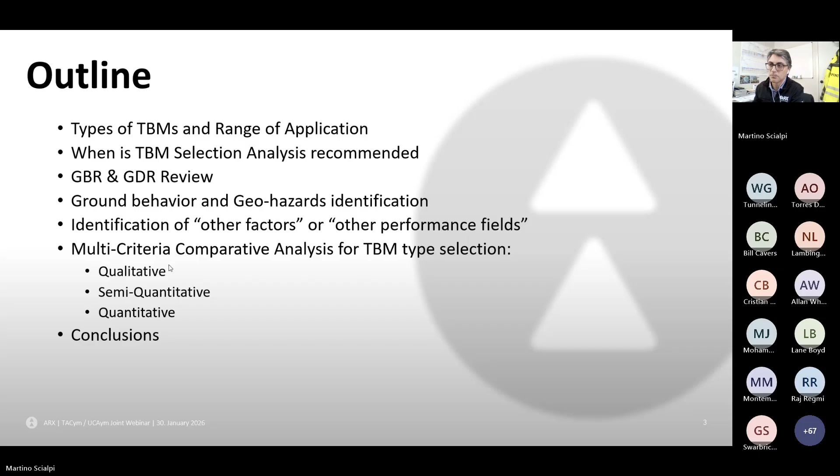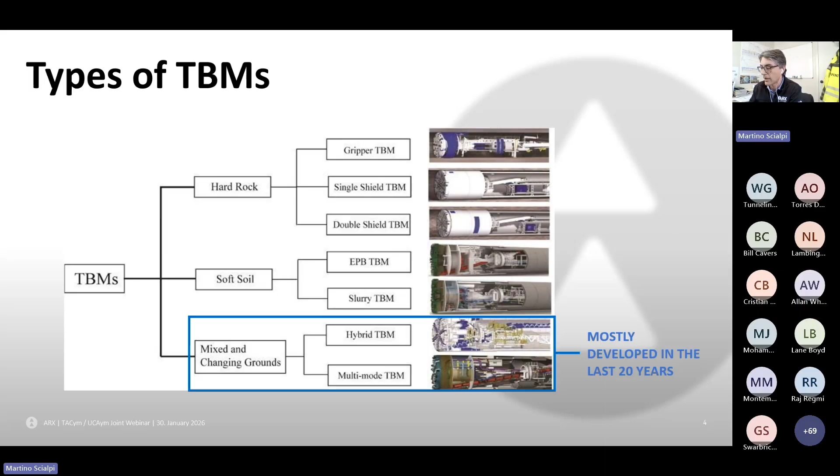So here we start with the types of TBMs. As I said, this has already been extensively covered in December. I just wanted to show you one more time that typically we classify them as hard rock and soft soil. The hard rock machines are generally three different types: gripper or main beam TBMs, single shield and double shield. In soft soil, we are very used to define or recognize EPB and slurry machines, but we also have machines that are able to adapt to mixed face and changing ground conditions, the so-called hybrid or dual mode or multi-mode type of TBMs that have been particularly developed in the last 20 years.

Range of application of hard rock machines. Briefly, when to use a gripper or main beam TBM: it's typically good rock quality with self-supporting capacity ground, where extremely poor or faulted ground is not expected, and where high water inflows are also not expected. As you can see on the right side here, there is a typical layout of a gripper or main beam TBM.

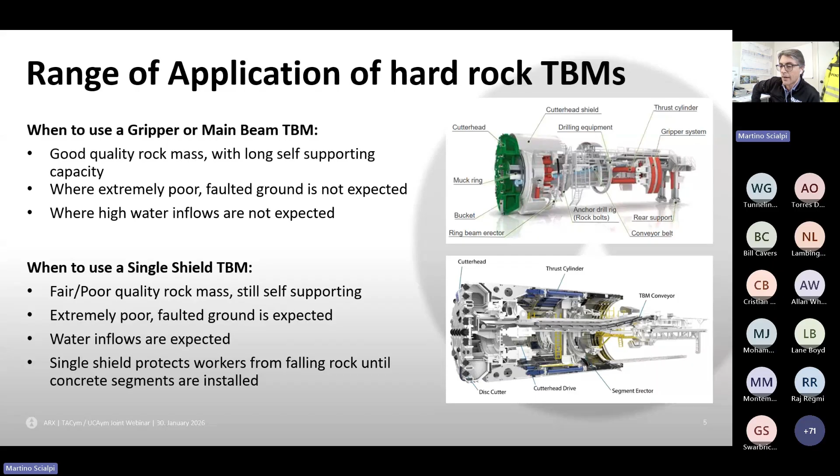In the same way, a single shield TBM would adapt instead to fair, poor quality rock mass, still self-supporting. Extremely poor faulted ground can be expected. Water inflows can also be anticipated. In this specific case, as well as the double shield we'll see next, the single shield is able to protect workers from falling rock until the concrete segmental lining is installed right behind.

Double shield TBM has a lot in common with a single shield. The main differentiator is that the double shield is able to advance and install segmental lining at the same time. It would adapt to poor quality rock mass with limited self-supporting capacity.

Fault zones can be expected, and high water inflows can be expected. In the same way I mentioned for the single shield, the tail shield and the whole shielded section of the machine offers protection to the workers.

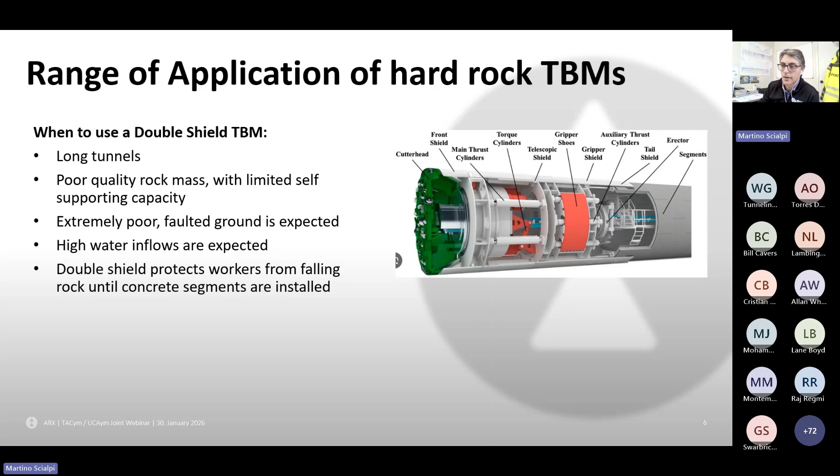Shifting to the soft ground hybrid TBMs, we know that EPB TBMs specifically perform better in cohesive ground with low permeability, and the use or addition of additives can extend that range of application also to sandy and gravel soils. The slurry TBM is more suited for permeable granular soils.

Polymers can be used to excavate ground containing high amounts of silt and clay, and can handle cobbles or lumps of rock to a size that can make it through the hydraulic mucking system. When combined with disc cutters, this machine is able to excavate rock too, while the hydraulic mucking system helps manage high water inflows.

And then there is the whole range of hybrid multi-mode machines that can be adapted to all these conditions, from soil to mixed face to hard rock, above and under the water table.

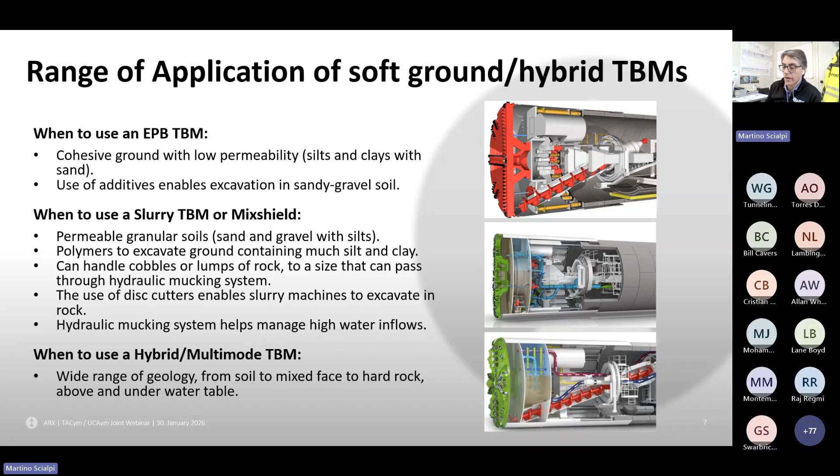With that covered as a refresher, let's get into the TBM selection analysis and when it's actually recommended to be performed. Assuming first that the TBM tunneling specifications allow a choice and aren't so prescriptive as to indicate a specific type of machine, the assessment and comparison of alternative approaches becomes necessary, in our opinion, every time geological complexity or uncertainty define the project.

Every time there are variable conditions along the same alignment, like rock, mixed face, soft ground, above and below the water table, high water pressure, high water inflow - those are the conditions that make the alignment and project complex enough to pause and take the time and effort to verify which machine and machine features would better comply with all the requirements.

Low ground cover and proximity to existing structures, like foundations or underground utilities, is obviously a discriminator above and below ground, along with limited or not fully representative geotechnical investigation. Sometimes we deal with projects where full characterization isn't provided - there are gaps of information - and that's where a TBM that can adapt itself to a wider range of conditions may be useful.

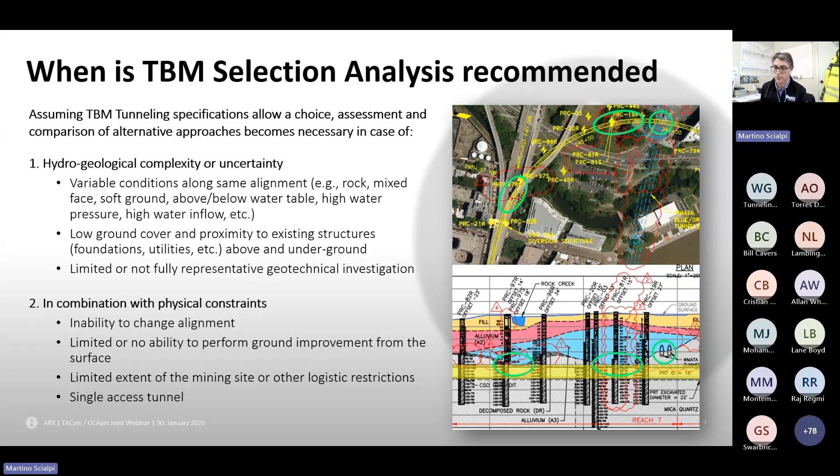The basic approach has long been that where the tunnel is very long or under complex geological conditions, the tunnel method is selected based on the condition prevailing along the alignment. But we're trying to move past that approach, leveraging the evolution of TBM technology over the last 20 years.

This means understanding project requirements and constraints, assessing the risk associated with each anticipated condition, and selecting the TBM technology that meets requirements and provides the best possible mitigation measures in all conditions - not just the condition prevailing along the alignment. The current TBM technology allows us to adopt this better approach.

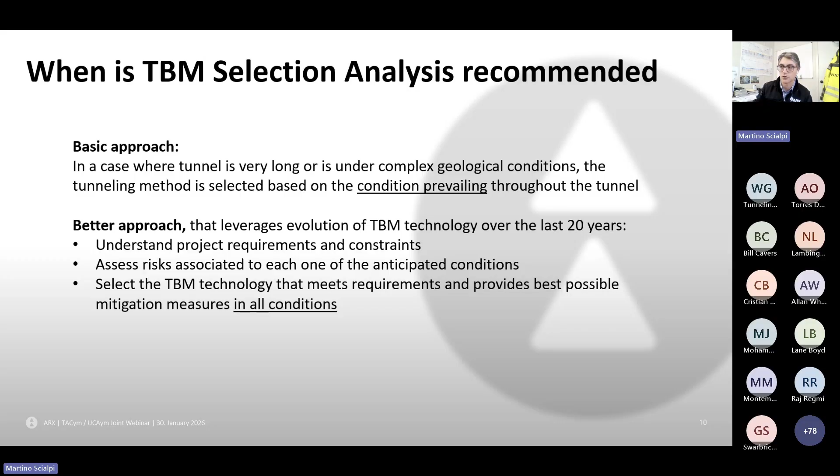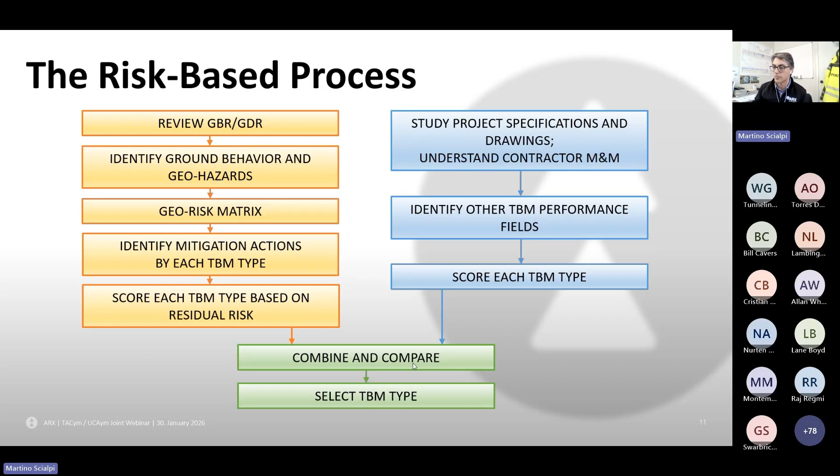So let's get to it, starting with the GBR and GDR review and what that means in terms of TBM selection. First, for those of us who may not be super familiar with a geotechnical baseline report and a geotechnical data report...

The first one is a contract document that establishes the best possible understanding or interpretation of the subsurface conditions. Its main purpose is to clearly define and allocate between the two contracting parties, the contractor and the owner, the risk associated with the ground conditions and behaviors being baselined.

The geotechnical data report is also a contract document, developed by the designer's geologic or geotechnical engineer, presenting or collecting all the factual information gathered during the geotechnical investigation program, which includes logs, photos, field, and lab test results.

Obviously, the intent and purpose here is to have baseline statements in the GBR that are consistent with the data gathered in the GDR.

For your reference, these definitions and a lot more can be found in the geotechnical baseline reports guidelines, published by ASCE and UCA of SME, but I believe it's widely adopted anywhere in North America.

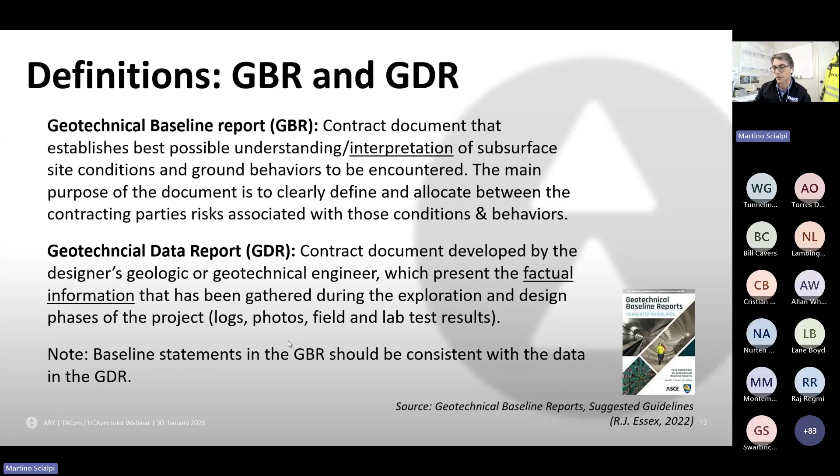So in the GBR for rock TBM tunnels, rock characterization is typically based on characterizing rock type, geologic formation, mineralogy, intact rock properties like bulk unit weight, compressive strength, elastic modulus, Brazilian tensile strength, and the abrasivity index. Degree of weathering, degree of fracturing in terms of RQD, joint orientation and characteristics are typically included.

Rock mass classification is not always included, but very useful to have - GSI and RMR, we'll talk more about those later. Groundwater: depth, conductivity, hydrostatic pressure, location of confined water, chemistry of the water itself, as well as predicted water inflow, which is not always included. And then contamination of the ground and groundwater, as well as the presence of gas.

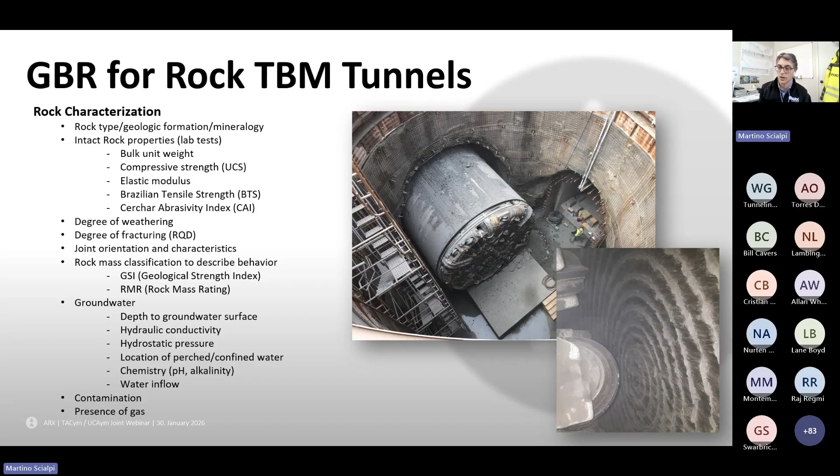For soft ground tunnels, soil characterization is typically based on soil type, thickness of the strata, blow count, grain size, percentage of fines, abrasivity of the soft ground or matrix, and a selected ground classification system that describes behavior - we'll take a quick look at that later.

Clogging potential is extremely important and is a decisive factor when it comes to TBM selection on many projects. Obstructions, natural and man-made - I'm referring to existing utilities if man-made, or abandoned foundation piles in the ground, as well as cobbles and boulders if natural. Groundwater: depth, permeability, hydrostatic pressure - this has a lot in common with rock - chemistry and water inflow, and again, contamination and presence of gas.

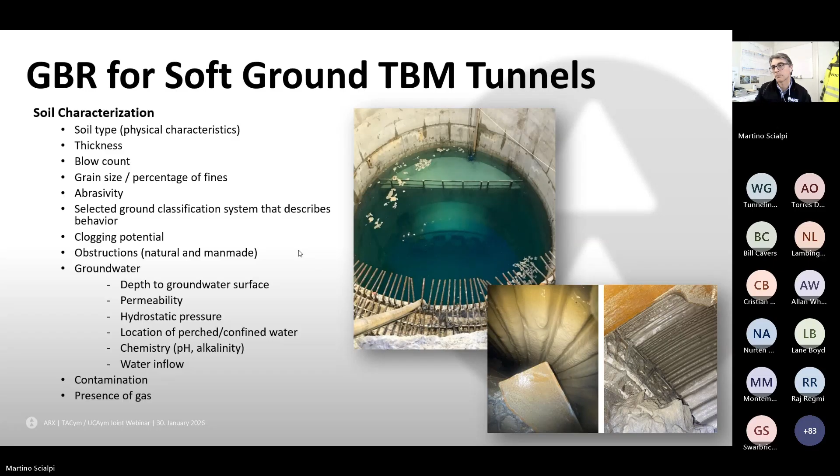The independent GBR and GDR review and interpretation happens by reviewing the raw data generated during the geotechnical investigation included in the GDR. It gets into characterizing the ground conditions independently with specific focus on data from the tunneling zone - the tunnel horizon, the tunnel envelope, plus or minus one diameter. You'd be surprised how different that interpretation may end up being versus the one provided in the GBR, which typically includes all the data at any depth.

Comparing results to charts or ranges including the GBR, identifying or trying to resolve any inconsistency between the independent ground characterization we perform as consultants and the GBR, and then defining the likely behavior of the anticipated ground with means and methods in mind.

Typically, the GBR is providing an indication. There is a paragraph specifically dedicated to ground behavior or interaction of the ground with the excavation methodology, but that doesn't always cover all the details contractors need. And then determining the geohazards and related potential impacts on the progress of the work during tunnel excavation is the real input we need to determine what's the best machine for the job.

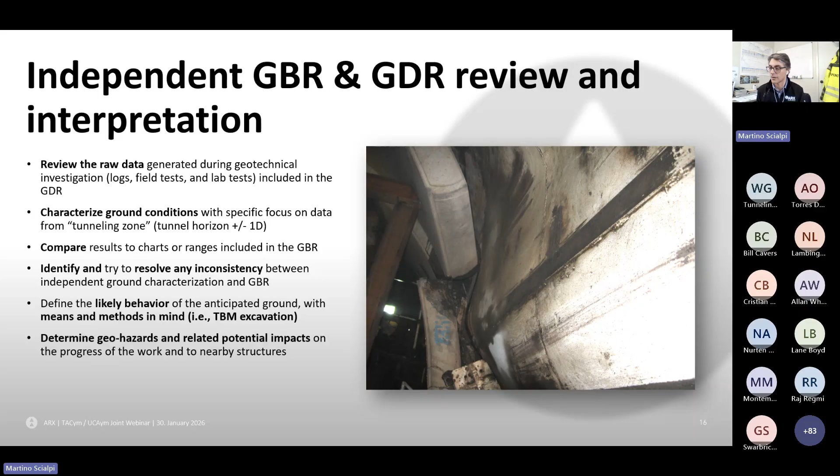You may be wondering, what's that picture on the right side? That is a picture from a job I was on many years ago, my first job actually, where we entered with our double shield TBM into very highly squeezing ground conditions, to the point where the tail shield was completely bent and deformed by the convergence of the ground around the machine, with severe damage to the lining. It's probably the best example I can give of conditions that were not predicted, mostly because of a lack of information over an extremely long and deep tunnel, which didn't recognize these as a risk.

Here are some examples of results from our independent analysis review of the GBR and GDR that we as ARX perform for contractors. As you can see, there are differences, and these are just a few of the things I can show you, but when considering the rock type for a specific job within the tunnel envelope of ±1 diameter, that's the area around the TBM that really matters for decisions functional to TBM selection.

As you can see, there are differences as well in the UCS. The distribution of the UCS isn't necessarily the one the GBR is baselining, because we are considering, most of the time, a different range of data, the one that in our opinion is more relevant.

For grain size distribution, in this specific case we consider all the data, but our replotting of the grain size curves isn't necessarily matching the boundaries set as baselines by the GBR, and that's very interesting information to have, as well as the clogging. On this chart, you can see that the medium and high clogging baseline is probably on the conservative side when you consider only tests from the tunnel envelope and the area of interest of the tunnel.

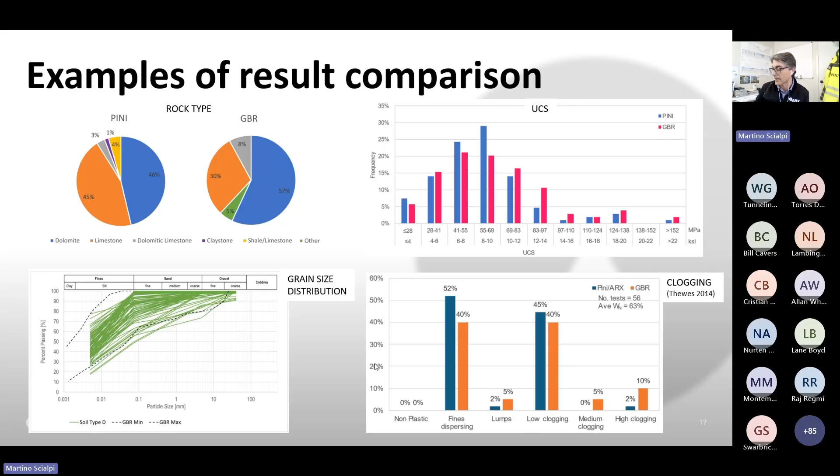Here is another example of a geomechanical characterization we perform for rock tunnels, done every time the GBR doesn't provide all the information actually needed, in our opinion, to characterize the ground and its behavior versus the type of machine needed for the job.

So in this GBR, we only have RQD, UCS, and BTS provided and baselined. On the basis of the geostructural and intact rock properties, the mechanical quality of the rock mass was estimated by us, determining the GSI and the RMR with a probabilistic approach. Obviously, the RQD alone was not sufficient to describe the rock mass conditions and classify the behavior, so we had to do something more, and with the data available in the GDR, we managed to determine GSI and RMR.

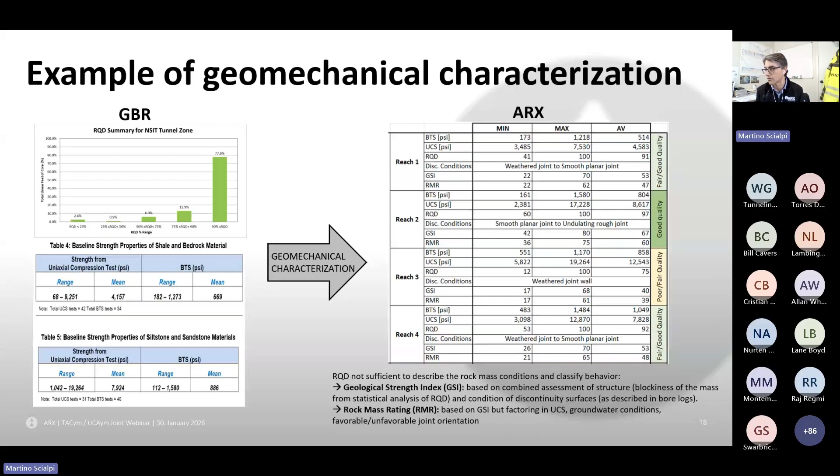This classification, or the determination of these parameters, helps define homogeneous zones along the alignment or reaches that are not just based on parameter distribution, but also on the actual quality of the rock and predicted behavior.

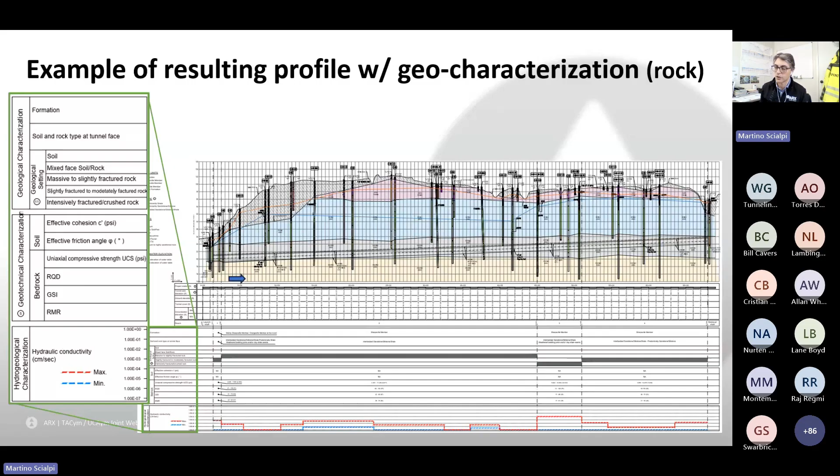Another example is this tunnel in rock, for which again we ran our own independent analysis. We provided geomechanical characterization with RQD, foliation joint orientation, Q value, RMR, and GSI. This is because, again, more indexes, the better.

In this case, this is a tunnel that is only partially excavated by TBM—there are also drill and blast sections—so having those parameters is definitely beneficial. The hydrogeological characterization is part of what we plotted along the alignment, as seen in the previous example, but this time we went beyond that by also calculating, in a tunnel where a lot of water inflow is predicted, what amount and where.

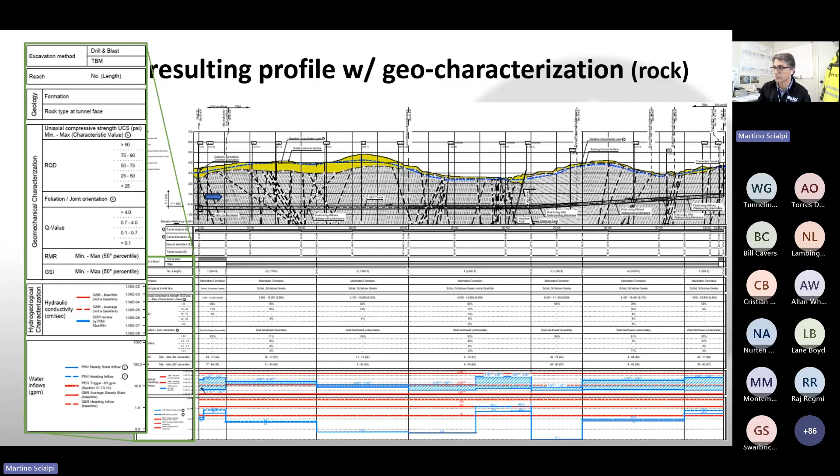Another example of a tunnel, slightly different. This isn't entirely rock, but rock and soil. The characterization here obviously had to tie into soil parameters as well as rock parameters, and we did the best we could to characterize the mixed face conditions at the transition between rock and soft ground.

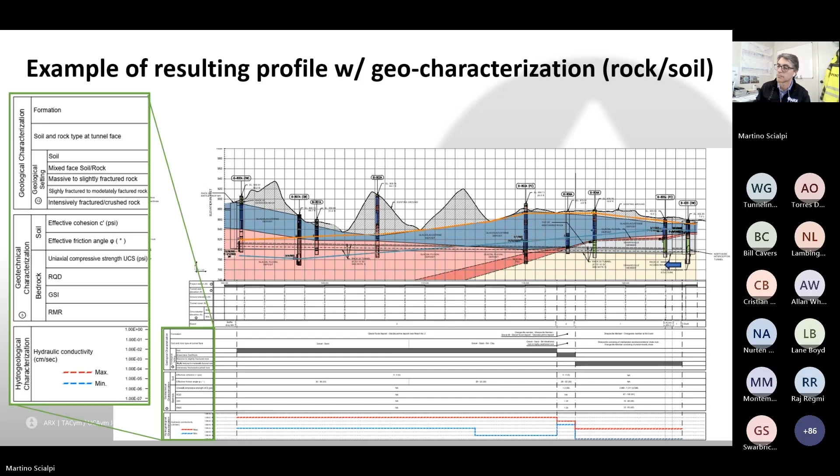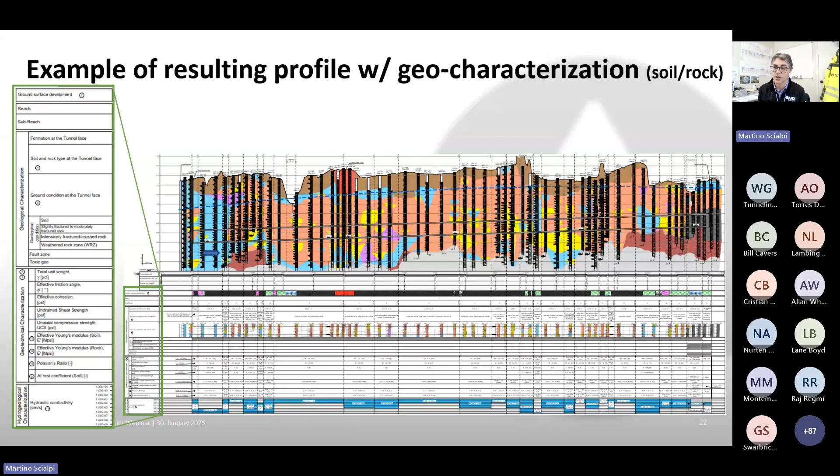Here is the last one, soil and rock again. As you can see, this is an extremely heterogeneous alignment characterized by granular material as well as silt and clay. So particularly in this case, it was very beneficial to develop this profile with specific characterization and identification of sub-reaches within the reaches already included in the GBR, in order to provide the contractor with a more granular interpretation of the expected ground conditions and behavior along the alignment.

So this is the data that you would typically need to then determine geohazards and ground behavior as a function of geohazards based on ground behavior. So the next step in the process, in that flow chart we saw at the beginning, is the determination of the excavation behavior and related geohazards. One methodology we like to use takes advantage of the multiple graph developed by Russo, who

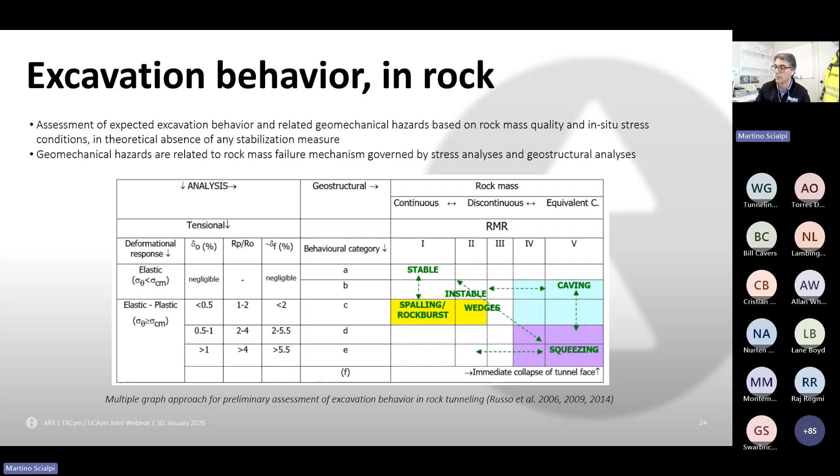is an ARX employee. But again, this is more for your reference. You find plenty of literature on this specific methodology developed by a colleague of ours. The implementation of the multiple graph approach is based on probabilistic analysis of variability of GSI and RMR. So you understand why it's so important for us to determine those two parameters and the combination of those two with the overburden conditions. This is a multiple graph, and by basically working your way through the four charts, it's then possible to determine the probabilistic occurrence of geomechanical hazards in each tunnel reach. You would repeat this effort for each one of the reaches along the tunnel alignment.

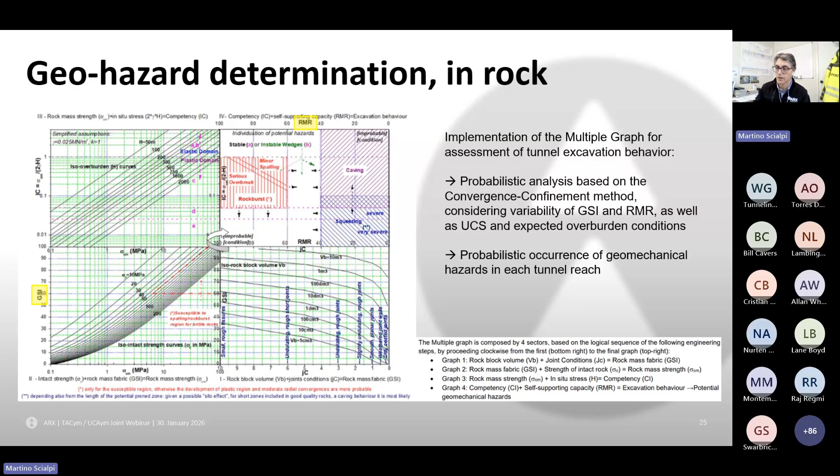When it comes to soft ground, there are engineering properties that are determined to basically characterize soil behavior. They are listed here: strength, compressibility and consolidation, permeability, density and compaction, as well as plasticity. All the above can be determined as a function of grain size distribution and Atterberg limits, which are typically included in the GDR. Without getting into too many details, a typical reference for the industry is the Tunnelman's classification for soft ground behavior developed by Terzaghi and Heuer.

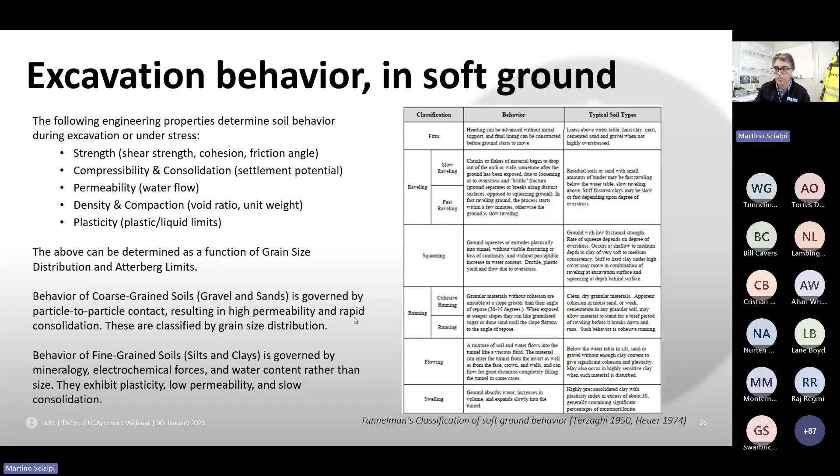So the most typical geohazards, let's get to the core of it. The most typical geohazards in rock are listed here. In our experience, those are the ones that we more often identify on tunnel projects, and these are the ones that then become input for determination of risk and TBM selection: unstable wedges, caving, rock burst, low rock cover and crown instability, squeezing and shield jamming with long and deep tunnels, high abrasivity and cutter wear, extremely hard rock to borability limits and low penetration. That is also the case on some of the jobs. Strength contrast at the face and uneven cutter wear, as well as clogging due to shale and clay seams.

So clogging isn't necessarily a problem you would encounter only in soft ground, it may affect you also in rock conditions. Large water inflows and grout washout, backfill grout washout, gassy conditions, as well as contaminated ground and groundwater.

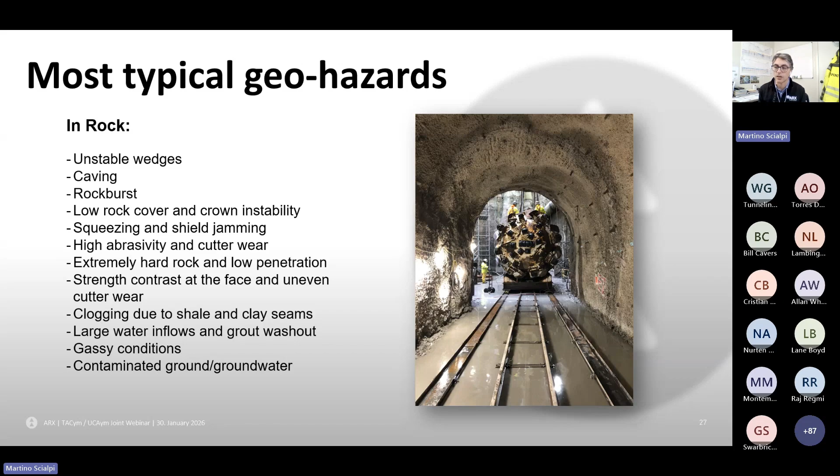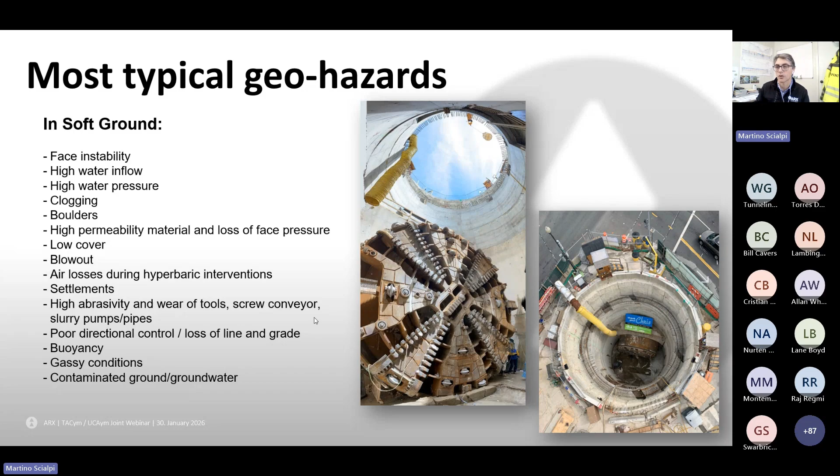Here is the typical risk analysis approach we utilize. It's based on the standard risk matrix setup, where the risk is a function of likelihood of occurrence and impact or severity. The ranges for impact on cost, time, health and safety are the ones that we typically adjust based on the project size, the value and duration.

So what you see here, less than 10K or between 10K and 100K, are the values specific to a project schedule and the project duration, as well as the time frames you see there. All those ranges will need to be adjusted based on the project. This one is a project in the $700 million to $1 billion range.

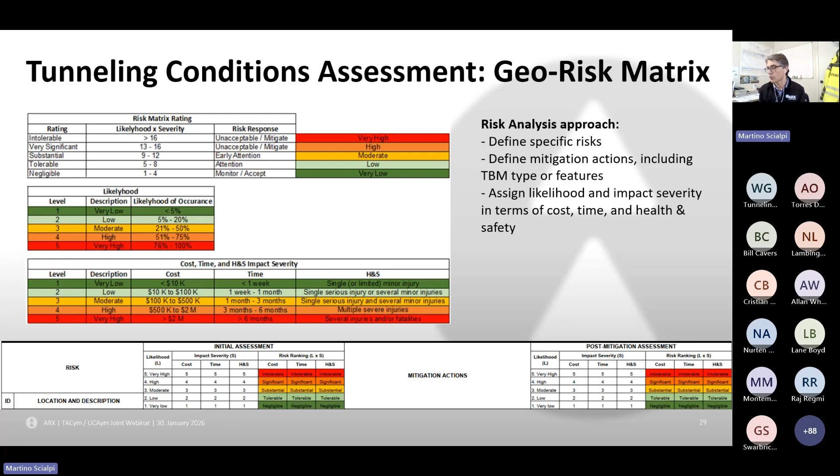And of course, by defining specific risks and aligning likelihood and impact in terms of cost, time, and health and safety, we can then fully characterize the risk, determine mitigation actions, including which will include the TBM type or specific TBM features, and determine a post-mitigation risk or residual risk towards the end of the table on the right side.

When you translate that risk assessment matrix into what actually happens, and where along the alignment, you obtain, in our opinion, the best way to visualize what risks are happening where, or can be expected where.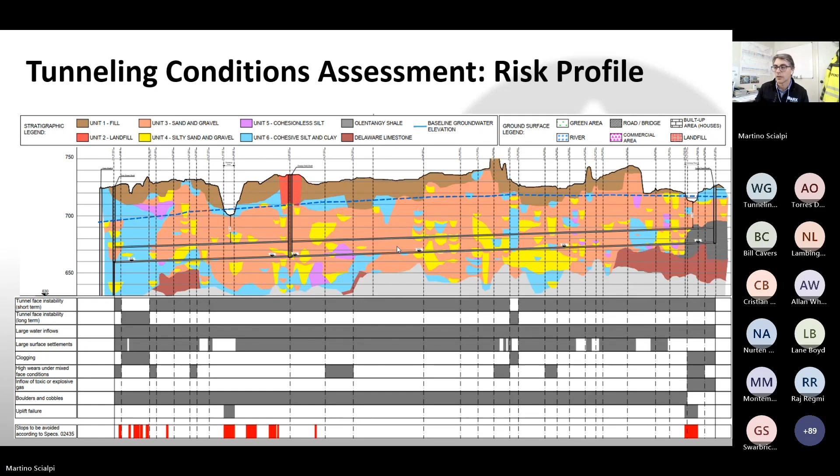Another example, two more actually, of projects where you can identify the effort we made to determine georisks translated into where they are and what their magnitude is along the alignment. These alignments have been divided into multiple sub-reaches in order for us to provide the contractor with a better understanding of the extent of the risk, which risk, and how much in each one.

The geotechnical hazards identified here again have a lot in common with the ones we've already listed before. Something different for the second case down below is the buoyancy and the presence of obstructions, but everything else is pretty typical.

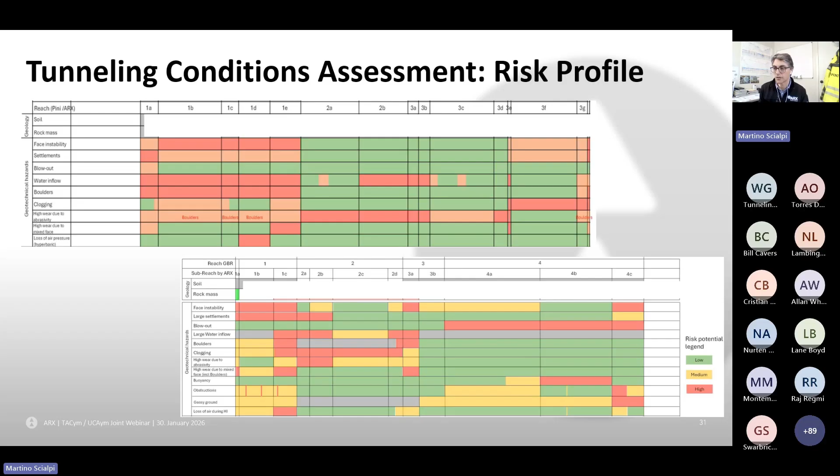So let's talk now about identification of other factors. As I mentioned at the very beginning, TBM selection isn't just about the geological and geotechnical conditions. It ties also into other aspects of the life of a project. Other performance categories essential to consider for TBM selection are obviously the tunnel purpose, the tunnel diameter, its length, and gradient.

So all the geometry factors obviously have an impact. The type of lining does have an impact. Tunnels required to have no lining or no segmental lining would definitely steer the selection of a TBM towards a main beam machine. But when segmental lining is required, you might have a wider range of options based on the variety of TBMs available, as we said at the beginning.

Then there are operational aspects like face pressure within the machine capability. As you know, just as an example, EPB machines do come with a technological limit in terms of face pressure that is around 6 bar. It is very hard or difficult for an EPB machine to perform effectively, or even be designed to perform, in pressure conditions above that limit.

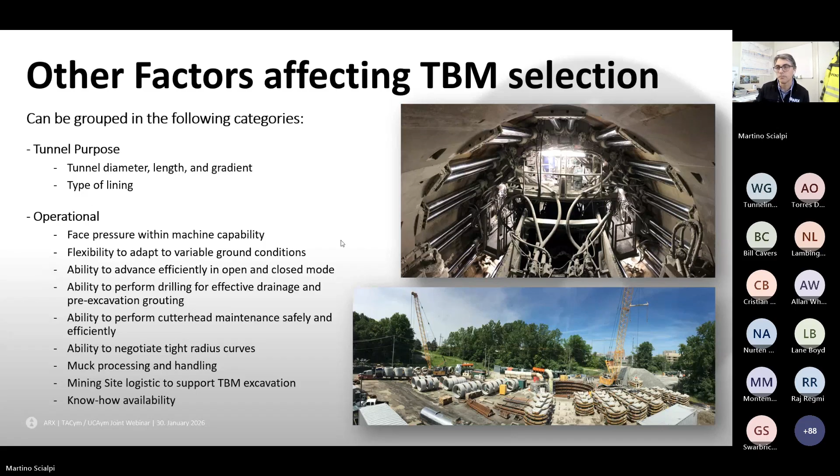Environmental factors obviously include muck characteristics, amount and type of additives used for excavation and ground conditioning, wastewater production, treatment, and disposal. On some of the jobs we've been involved with, reutilization of the water has become a determining factor for the type of TBM technology being selected. Water consumption, power consumption, and availability, of course, and tunnel classification.

Is this a tunnel non-gassy, potentially gassy, or gassy — just to use the terminology OSHA typically defines, and the terminology that is typically applied to tunnels in the USA.

And then there is a whole section of the TBM selection process that deals with planning. Schedule and cost are key factors, where assembly and startup time, or advance rate, or the time it takes to reconfigure — if you're talking about a dual mode or a hybrid machine, the time it would take to reconfigure or convert that machine into a different mode of operation — is definitely something you may want to consider, and its impact on the schedule. Cost is, of course, determining.

The budget for a lot of these projects is extremely tight. The capital investment for some of these very sophisticated TBMs is high. Auxiliary equipment may be involved with any type of machine, but some of these machines would require entire systems like a slurry treatment plant that comes with a cost. And of course, there's availability of used machines.

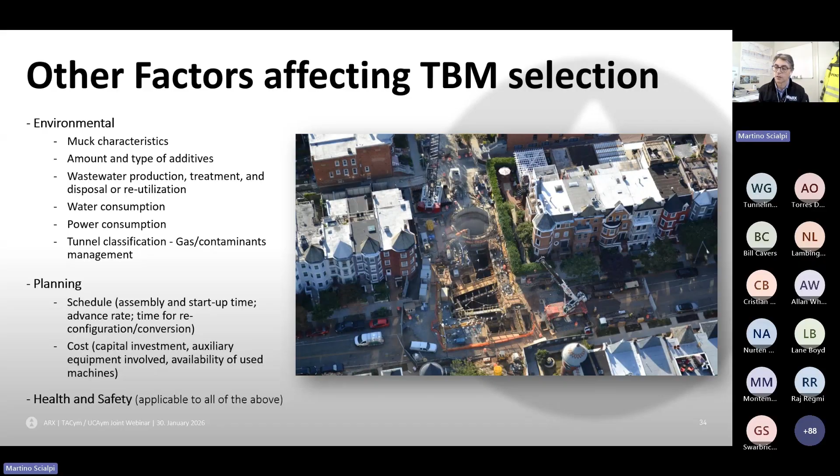So let's get to the multi-criteria comparative analysis. What's the output of all these efforts?

The TBM selection used to be limited to dualism. It used to be open versus shielded TBM in a rock type of tunnel, or single shield versus double shield TBM, again in a rock type of tunnel. In soft ground, for a long time, it's been EPB, earth pressure balance, versus slurry TBM or mixed shield TBM. This is a chart we can probably recognize and are all familiar with, but that is what used to be.

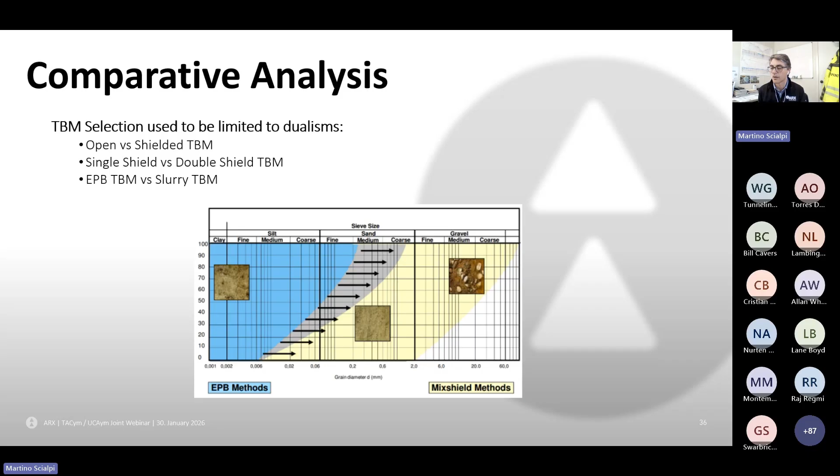Fields of application of different machine types are now overlapping, as I said. The same machine can support different excavation methods. We can call them different things - hybrid, dual mode, variable density, which is a specific type that covers a very wide range. And they can mitigate georisks more or less effectively.

We'll talk about the clogging potential a bit more later. The same machine can be set up in different ways, and here is a non-comprehensive list of typical things that are considered.

Even after the TBM type is selected, there is a whole range of other toolbox items that can be implemented to satisfy specific project needs and mitigate specific risks: cutting tools type, size and configuration, 17 inch versus 19 inch, soft ground tools versus hard rock cutters, adjustable overcutter by shimming manually or by an automatic system when access to the cutter is not easy.

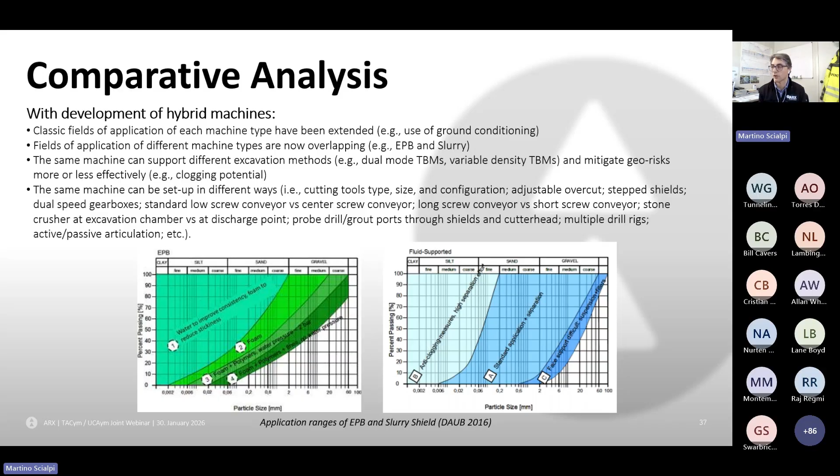Stone crusher at the excavation chamber or at the discharge point, having the ability to probe and grout. The biggest differentiator in this case is the operational performance field, due to the higher flexibility offered by a variable density type of approach.

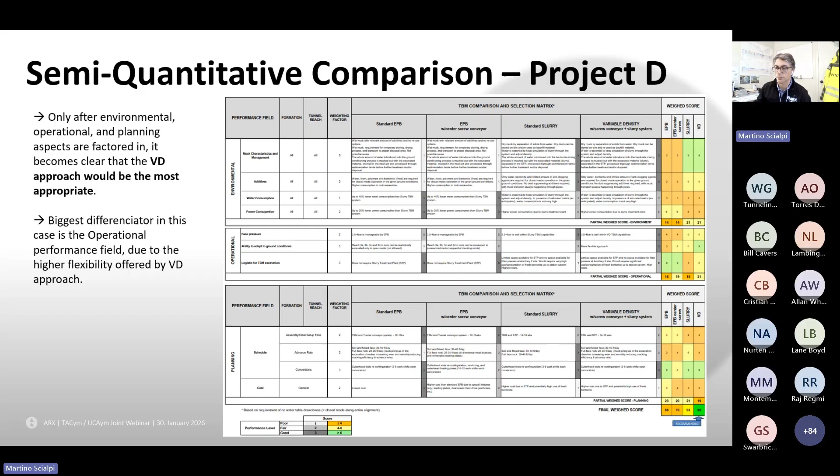And here is the last part, which deals with quantitative comparison. This is where we go into further discretization of magnitude and spatial extent of each risk factor already identified throughout this whole process.

We achieve that by dividing the TBM tunnel alignment not only into reaches and sub-reaches, but into standardized units of 50 to 100 meter length. Based on measuring the residual risk after implementation of different TBM types, we perform a post-mitigation assessment and determine the residual risk. This residual risk is illustrated per each standardized interval, per each category - cost, schedule, and health and safety - and per each TBM type.

This gets to a level of complexity and detail that is definitely quantitative. In this way, we are able to determine the frequency of occurrence and anticipate the number of times each hazard will present itself along the alignment.

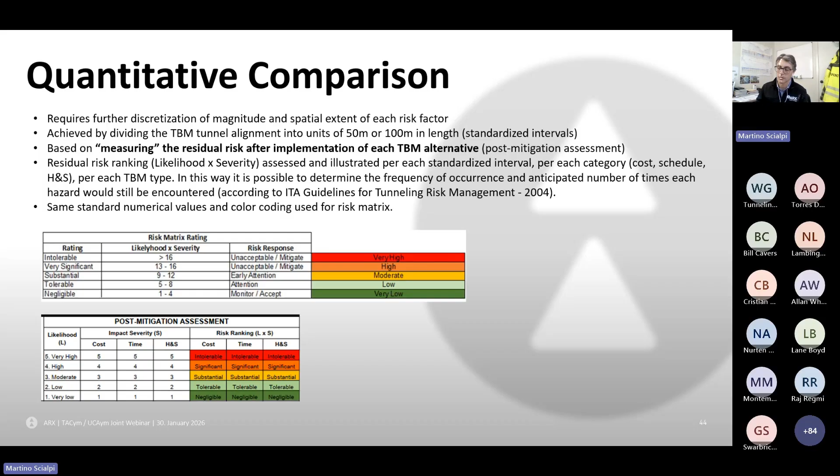This whole process is performed in accordance with ITA guidelines for Tunneling Risk Management released in 2004, for your reference. The same standard numerical analysis and color coding is used for these risk matrices, so I'm not going to repeat myself, but this is how the work is structured.

What you see here is an example of an alignment divided into 50-meter intervals with the same top 16 residual risks ranked by each category. So each machine - this specific type, EPB - is applied to the geohazards. Everything is scored in terms of residual risks on health and safety, schedule, and cost for the EPB alternative. What you see in green is clearly the areas where the EPB type performs at its best.

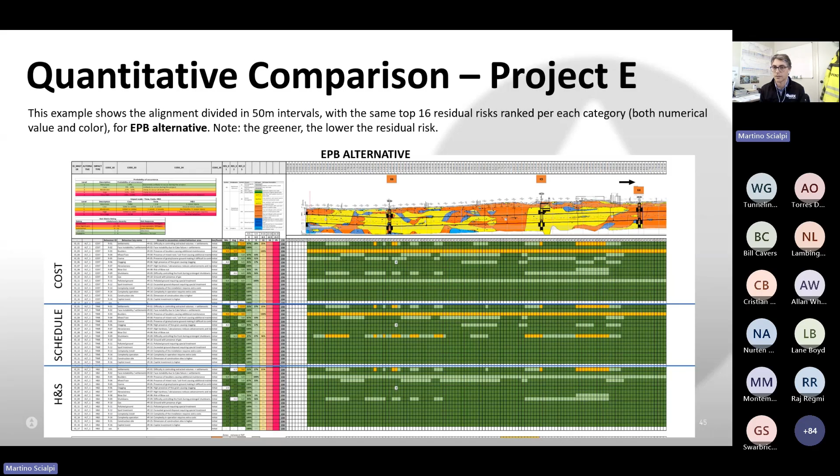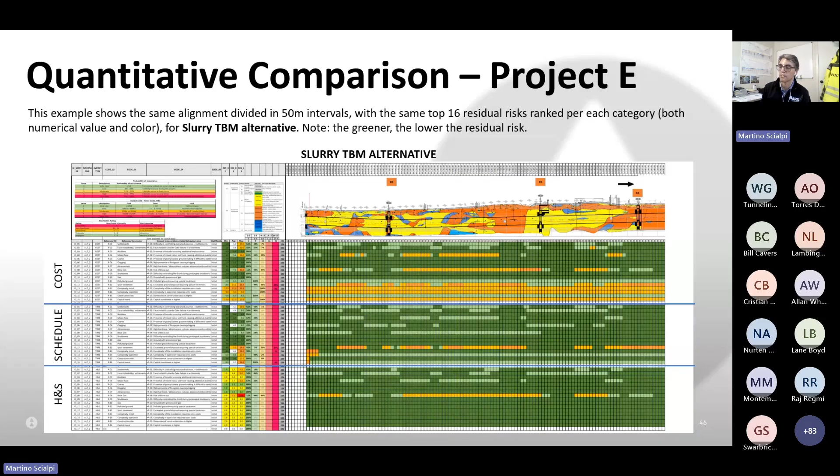Here is the same alignment, same project, with the risk determination and with the scoring performed at 50-meter intervals on the same risks for a slurry TBM alternative. As you can see here, there is clearly an area where the alignment is marked as yellow, and that is where the slurry TBM doesn't necessarily perform as well as the EPB in this specific case, but more in general in terms of costs, due to the fact that you have to factor into a slurry TBM selection the additional cost that comes with the slurry treatment and separation plant.

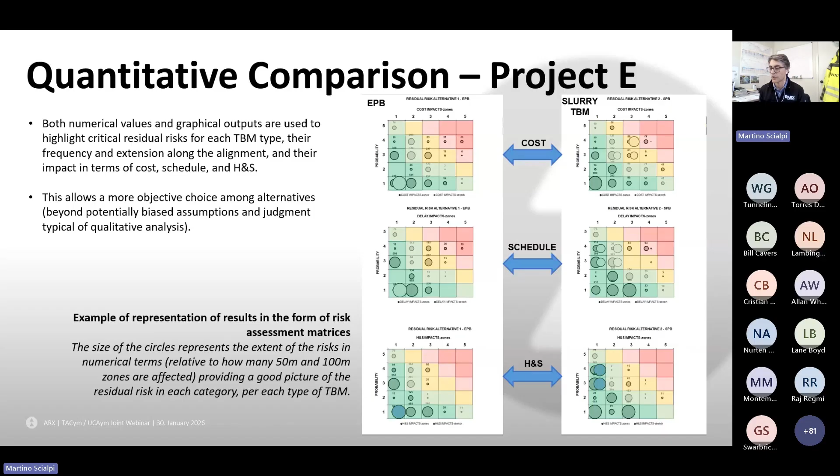And this is the quantitative comparison, the output basically of this effort. So the numerical values are represented here on a typical risk matrix for each TBM type, and the size of the circles you see here represent the extent of the risk in numerical terms. In some of the cells you see 2 circles because this specific analysis was performed both on every 50 and every 100 meter zones along the alignment. But this is definitely a good picture in terms of cost, schedule, and health and safety of where the residual risk is by applying 2 different TBM technologies.

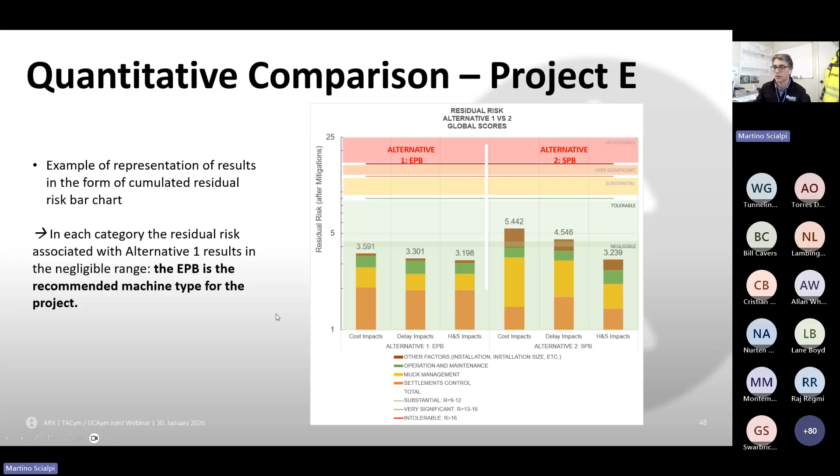Briefly on the conclusion, so we have a few minutes for questions. If the contract documents allow TBM choice, a multi-criteria analysis is, in our opinion, always recommended. The assessment process starts with independent and in-depth review of the GBR and GDR to characterize ground behaviors that are not necessarily covered in the GBR and define the main geohazards. The type of TBM and TBM features are then intended as mitigation factors, mitigation measures in the risk matrix, in the risk assessment process.

As we've seen, geology is not always the only factor. There is plenty of other performance fields that will need to be considered. Incremental levels of detail of comparative analysis are possible, but this is based on the project complexity and the severity of the risks. So you can pick and choose a qualitative or a quantitative type of analysis based on the degree of complexity and how big is the challenge. A multi-criteria analysis provides technical validation of the most consequential decision, in our opinion, on any TBM tunneling project, which is the machine selection. With that, I think we can move into Q&A.

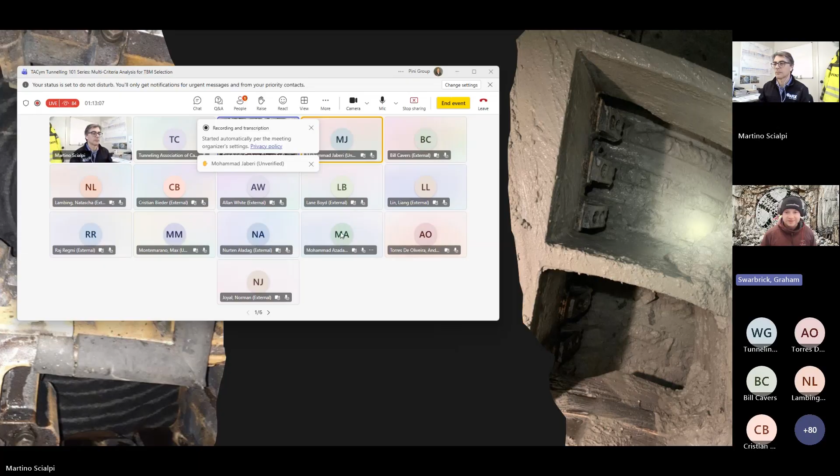Number one, so on the topic of lessons learned, this is a fantastic system, it seems, for numerical evaluation of TBM selection. Has your company or anyone in the industry done studies after the project, analyzing the performance and seeing, is this model tracking that it's quite accurate in its ability to predict TBM performance, or are we seeing discrepancies between the assumptions made based on the GBR and then the actual performance or actual encountered conditions by the tunneling machine?

Yeah, great question. And this is the very reason we always like, as a company, to stay engaged, not only at the pre-design or design stage, but also during construction. We do need, in order for our methodology to improve, to factor into our methodology lessons learned. So far, yes, we've learned a lot, but in general, all the recommendations we've made through this methodology have then revealed themselves as very useful and appropriate during operation.

There are obviously, specifically when it comes to not the TBM type, but more often to specific features, some of which I've already mentioned, to be implemented on the design or on the manufacture of the TBM. When it comes to specific features, then we've learned that the addition of more tools in the toolbox, or specific tools in the toolbox, would have been probably better. In some cases, they were overlooked or not considered well enough in the selection process. It wouldn't have changed the final conclusion of that selection process, but those are the lessons learned and then we use them the next time, right?